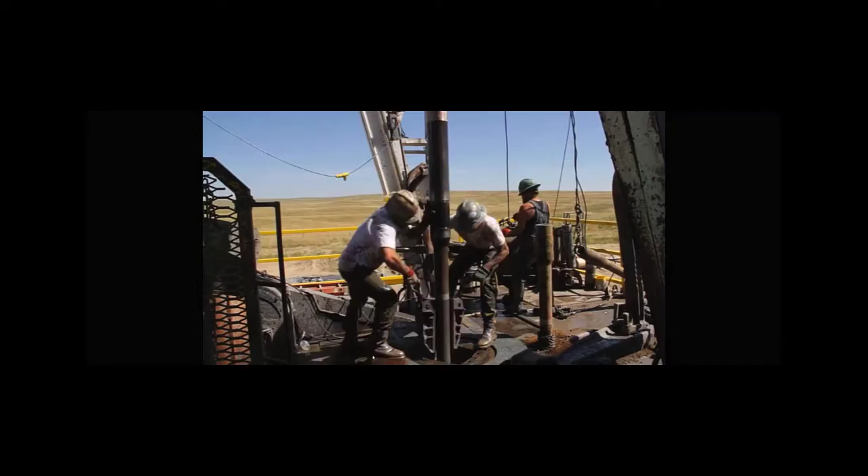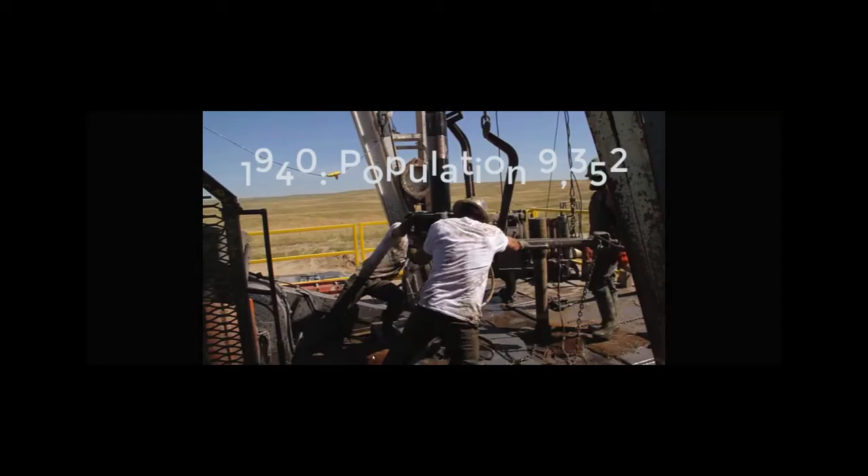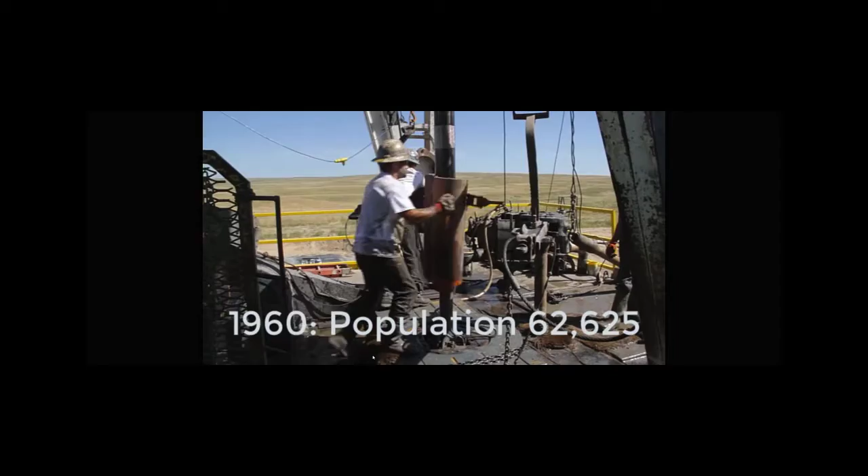Midland. In the great 1980s, when the boom came to town, and all them big old buildings, they just shot out of the ground, out in Midland. Midland. The Roughnecks run the auger and dance a black gold jig out in Midland. Midland. Out in Midland. Out in Midland.

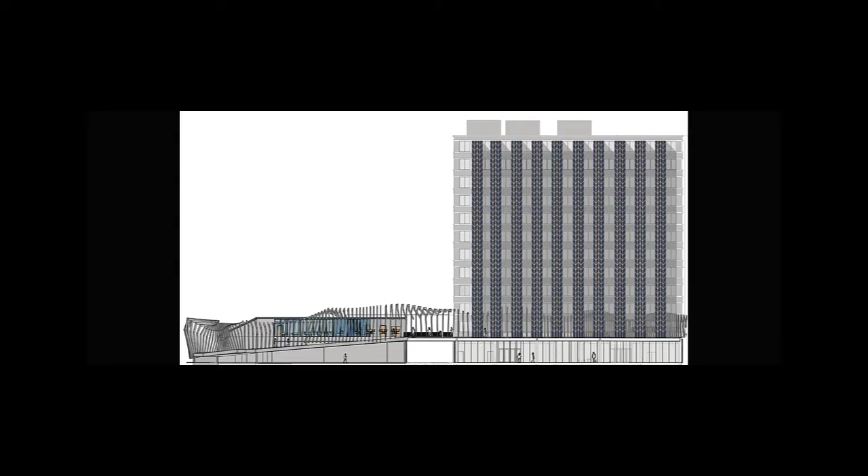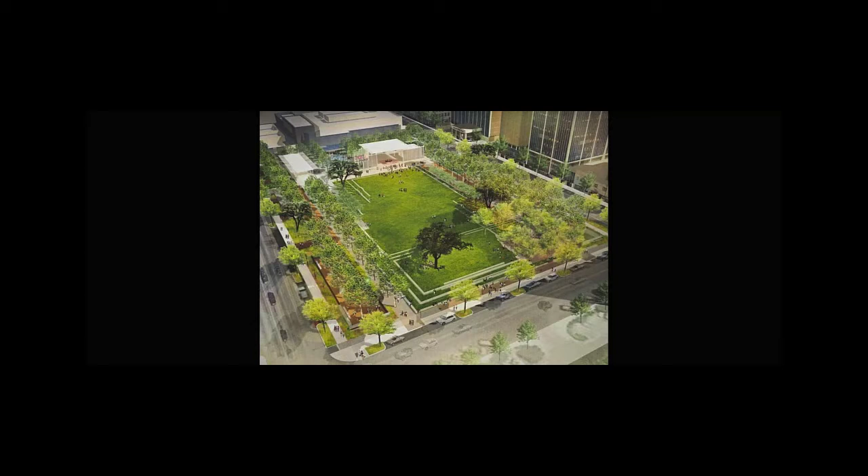Our project is located on the corner of North Colorado Street and West Texas Avenue. It sits catty-corner to Centennial Park, which is to be completed in 2020. Our team intends to use Centennial Park as a transition, and better yet, an extension into our concept. We will do so through the use of our bridge.

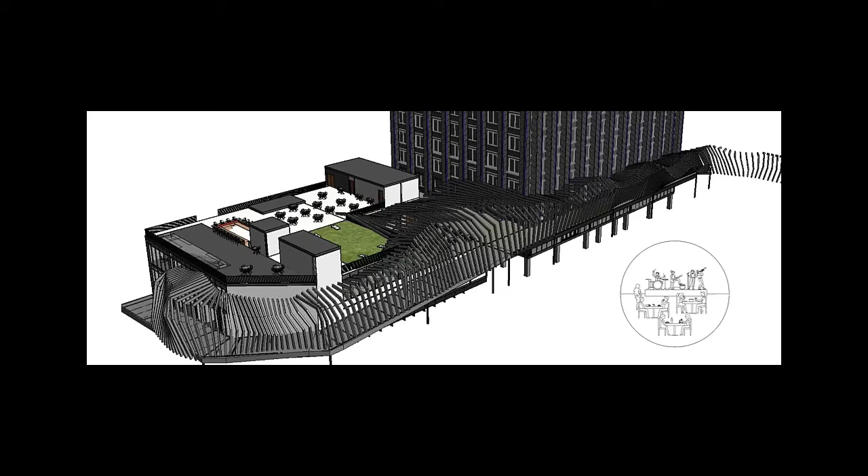Our interactive bridge leads from Centennial Park to the hotel and seamlessly flows on to the convention center, showcasing several public spaces and amenities we intend to provide. Our conference center will attract the community member and businessman alike through personal and business meeting areas, luxurious ballroom and fine dining, as well as a full-service restaurant and bar.

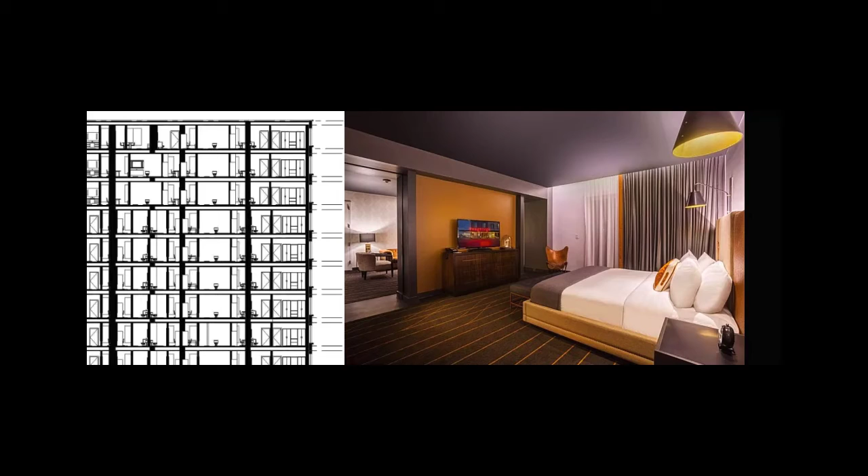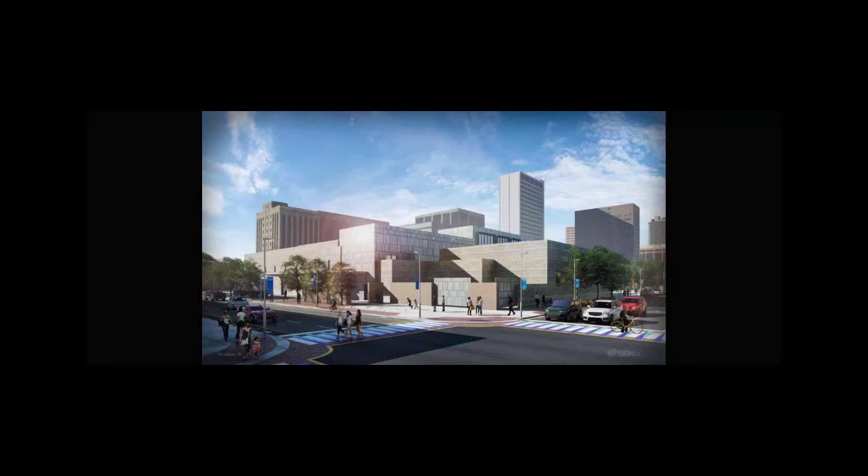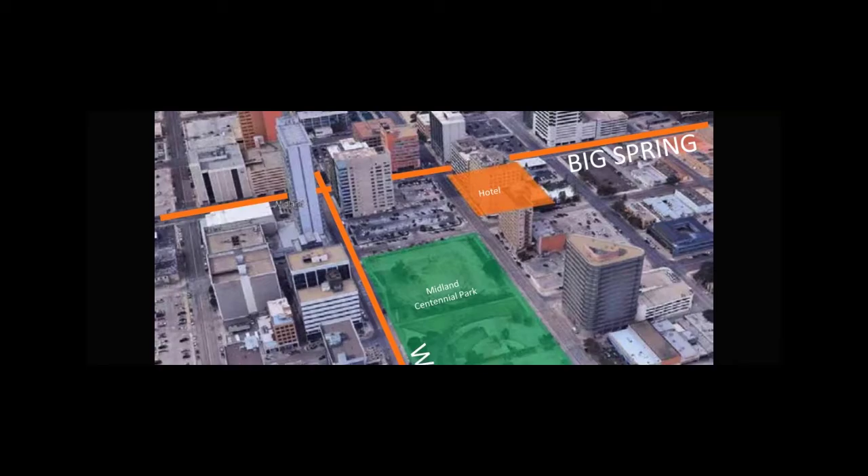Emulating the success that Century Square in College Station has, we will be using the George Bush Convention Center and the subsequent park, Centennial Park, that shall be completed before our project comes to market, to showcase the real image making that the city of Midland has invested so heavily to produce. We hope that it draws them towards our hotel, towards our concept, and eventually towards Midland.

So hopefully through that video you were able to pick out a little bit of the QBL analysis, but I'll go through and talk about specifically some of the things that we wanted to focus on.

For the social and cultural element, we wanted to create and bring to market a center for the community, a place where everyone can come and spend time, working out, meeting, doing business meetings, or grabbing a drink at the bar, having a nice meal at the restaurants. Through that, we would provide a sense of cultural cohesion.

We wanted to use the fact that Midland has been brought up through the petroleum industry and put that into our project to ultimately provide a sense of place for the community.

Economically, we wanted to provide retail, different restaurants and bars, coffee shops in order to support the local economy, to bring money back into Midland. Hopefully by doing so, we would initiate the downtown to be rejuvenated.

A lot of the old buildings that are there, they're up there because of the oil industry. It boomed, and as soon as it busted, everyone leaves. So we wanted to rejuvenate the downtown, as well as income diversification, so you have shops, retail, coffee shops, other stuff. We wanted Midland to be known not only for oil and petroleum, but also for downtown and being able to do different things throughout Midland.

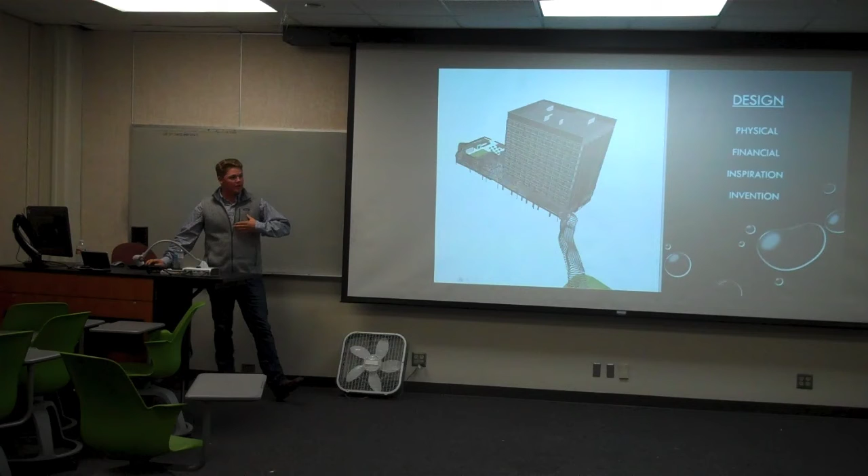Through the activation, obviously creating that sense of place and image-making, we're encouraging a community sense, a community feel, so that hopefully people will enjoy it and visit not just once, but want to come back over and over again. As they have that repeat visitation, they'll also be creating a sense of ownership—I belong here. It's not necessarily mine, but this is a project for me, a concept for me.

Through the management, we wanted to provide premium service. We're looking at different ways to use the fitness center and memberships for people that aren't only staying at the hotel, but locals who live there and want a quality workout facility. We're looking at doing some sort of membership deal with that, and also, whenever we can, minimizing the operating costs of the project once it's given to the market.